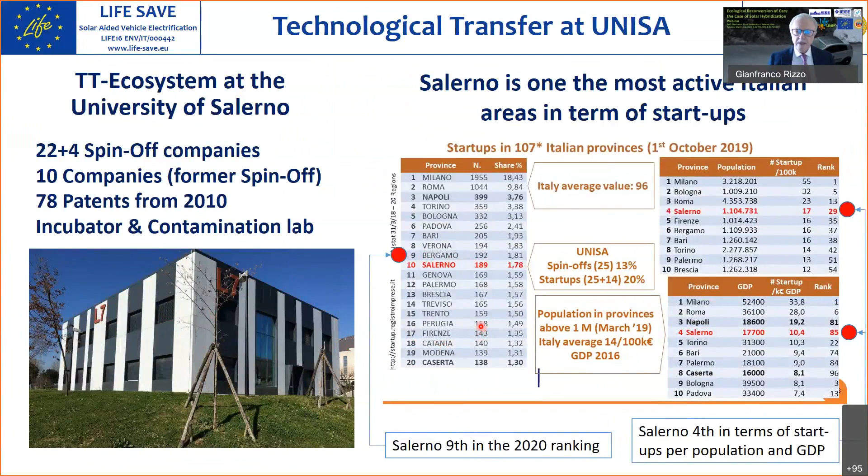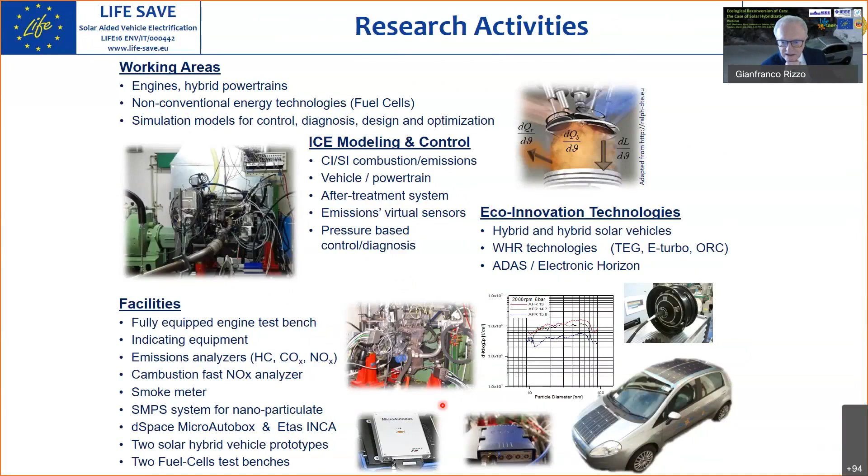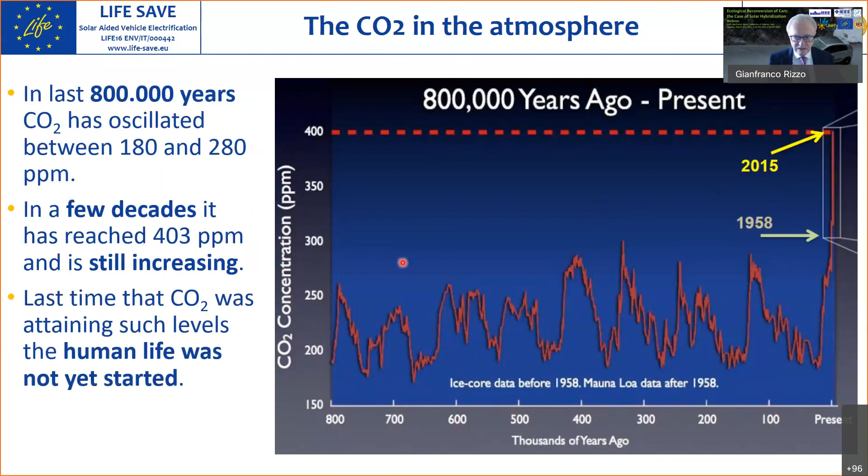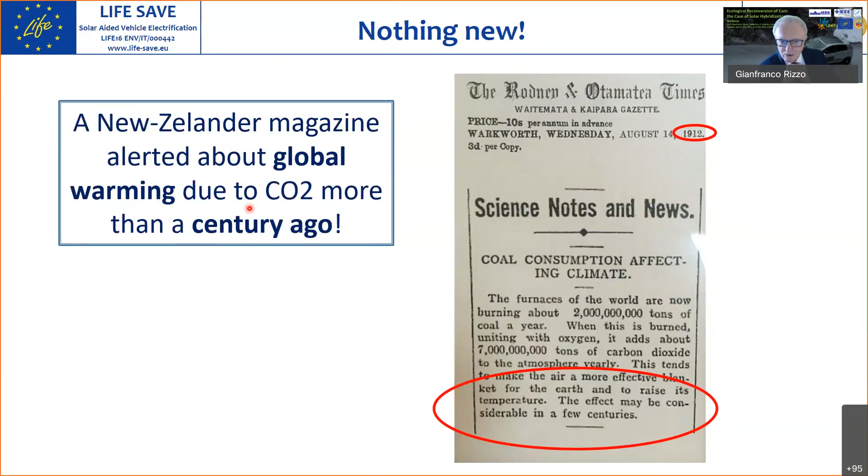In the last decades, CO2 concentration has reached values which have never been reached since human life was on earth. So it's a very, very serious problem. It's a serious problem, but it's not a new problem, because more than 100 years ago, a New Zealander magazine was already alerting about global warming due to CO2. So it's not a new problem.

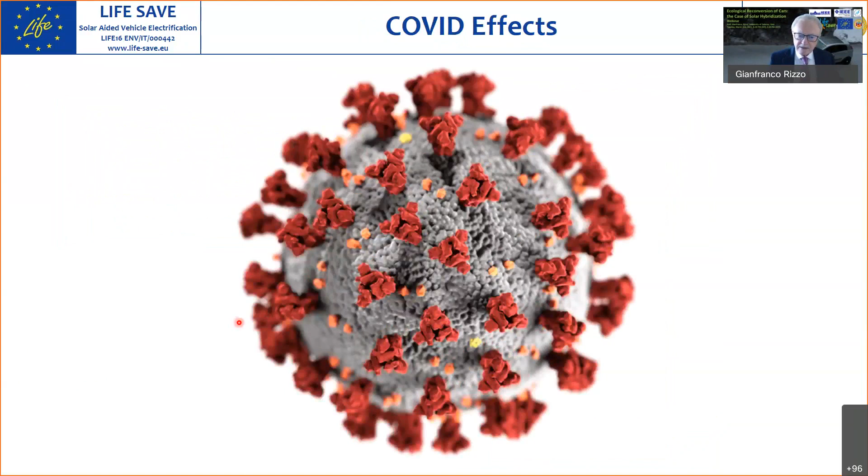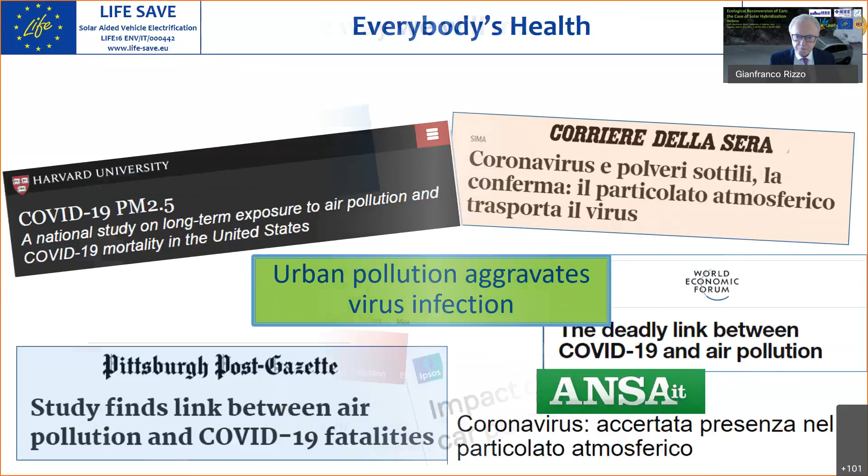In recent years, we have some additional problems which made this problem even more serious. One is due to the effect that global warming may have on the Earth, due to the possibility it could unleash some viruses, and also there is some evidence that urban pollution may aggravate virus infection due to transport of the virus. Also, it's reasonable that due to these constraints, there will be greater use of private cars for personal transportation in the near future.

And finally, we are facing a very serious economic crisis, and so we need reasonable and affordable proposals aimed at the majority of people in the world, not only in rich countries, able to create job opportunities.

Looking at the categories of sustainable mobility. So please, I hear some voice. If you can, cut off the microphone, please.

There are two categories of sustainable mobility. One is, of course, electric vehicles. The most common solution is the battery electric vehicle, an electric motor which may reach quite high efficiency, is fed by a battery, moving the wheels.

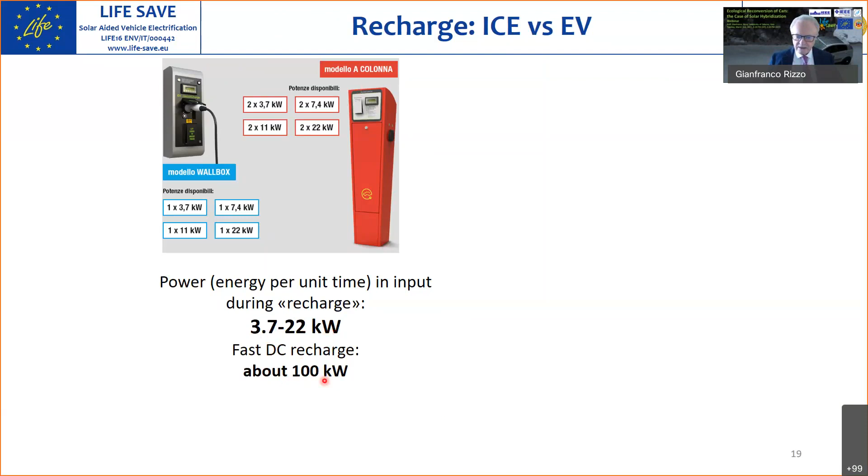But if we calculate how much energy enters in a unit time in an internal combustion engine, we reach almost 10 megawatts. So it's 100 times greater than the power of recharging electric vehicles. So there is still a big gap to be overcome.

So we may say that mass car electrification is the future, but it's not just around the corner, speaking about mass car electrification.

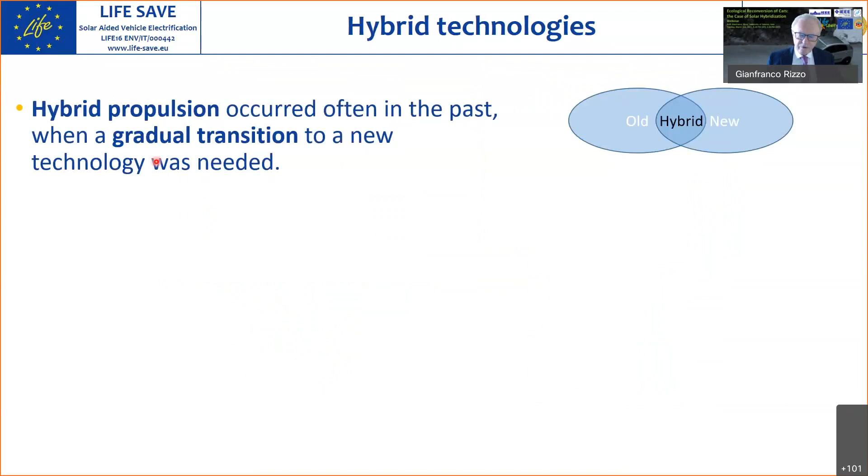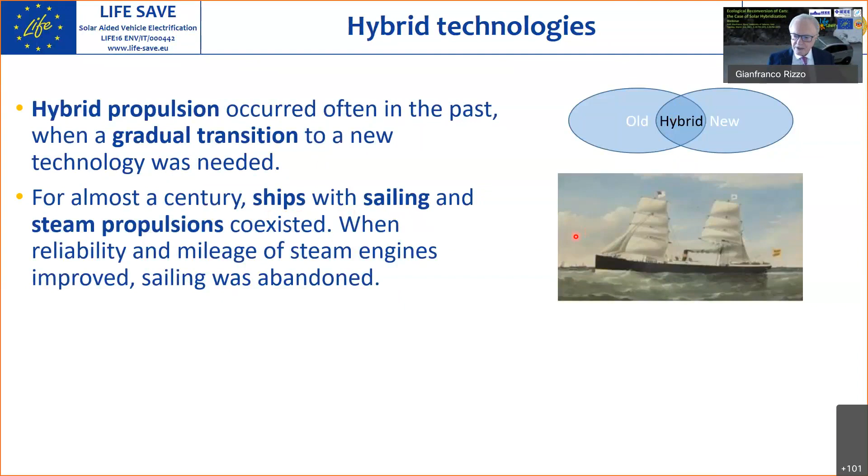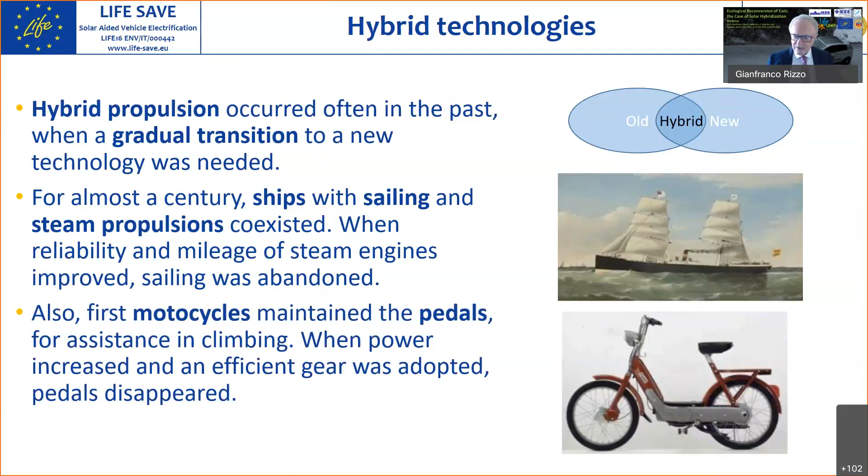As often happens when there is a transition from an old to a new technology, there is a gradual transition with some hybrid in between. So also when ships passed from sailing to steam propulsion, for a period these two technologies coexisted. And also motorcycles maintained pedals for assistance in climbing in their first years.

Now the hybrid vehicle market is growing fast and is anticipated to have an annual rate of growth of about 16% during the period from 2020 to 2025.

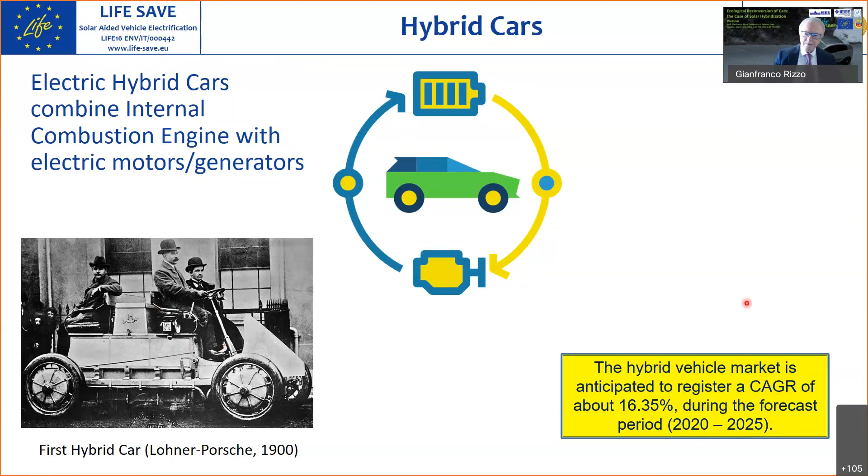Going to hybrid vehicles, there are different technologies. One is the architecture of a parallel hybrid, where the electric motor and the engine may cooperate to move the wheels, going in parallel.

The other architecture, less diffused, is a series hybrid, where the electric motor alone moves the wheel and the engine recharges the battery by means of an electric generator.

A special category of parallel hybrid, strictly related to our case, is the parallel through-the-road hybrid electric vehicle. In this case, the engine moves two wheels, and there are two wheels moved by electric motors in the wheels. The other two wheels are moved by the classical internal combustion engine. So the mechanical coupling between these two is made by the road, hence the name through-the-road parallel.

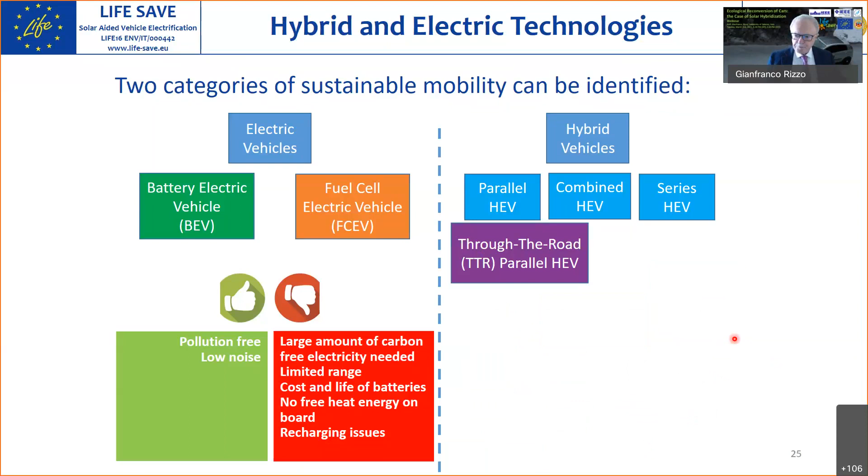And finally, we have the plug-in hybrid electric vehicles, which may be recharged both internally, by regenerative braking and by the engine itself, and by the electrical grid.

Also, in this case, we have some positive and negative aspects for hybrids. They have lower emission compared to internal combustion engine vehicles. They have an extended range, so they don't suffer from the range problems of electric vehicles.

But also in this case, some carbon-free electricity is needed for recharging from the grid. There is still an issue relating to cost and life of batteries, if less strong than in electric cars, and they have no zero emission.

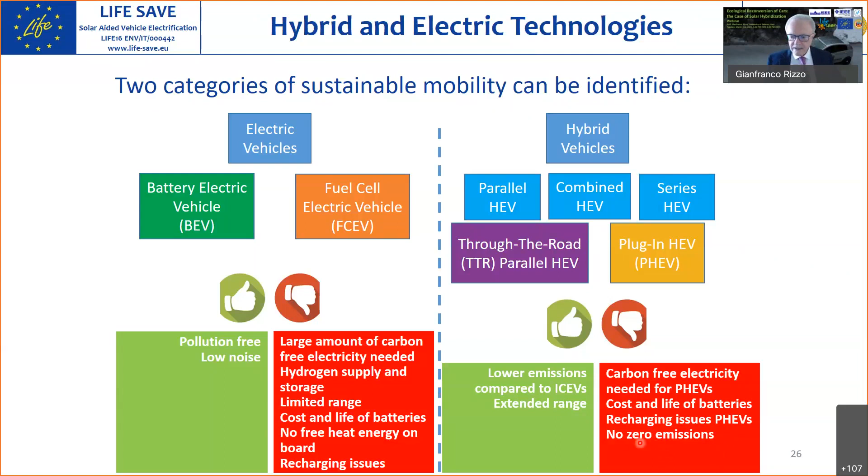We could speak a lot about hybrids. In this seminar, we can just give some brief information. One of the key parameters to classify hybrid vehicles is the degree of hybridization.

The degree of hybridization is defined as the ratio of the maximum power of the electric motor over the sum of the maximum power of the internal combustion engine and of the electric motor. This ratio may range from 0 to 1. 0 means we have the classical thermal engine, and 1 is the electric vehicle. In between, we have a large range of hybrids.

We can also say that only vehicles with enough degree of hybridization reach the real benefit of a hybrid, while all these vehicles are called hybrid. This is another problem: be aware that we can call hybrid also a vehicle with very few features of hybrid vehicles.

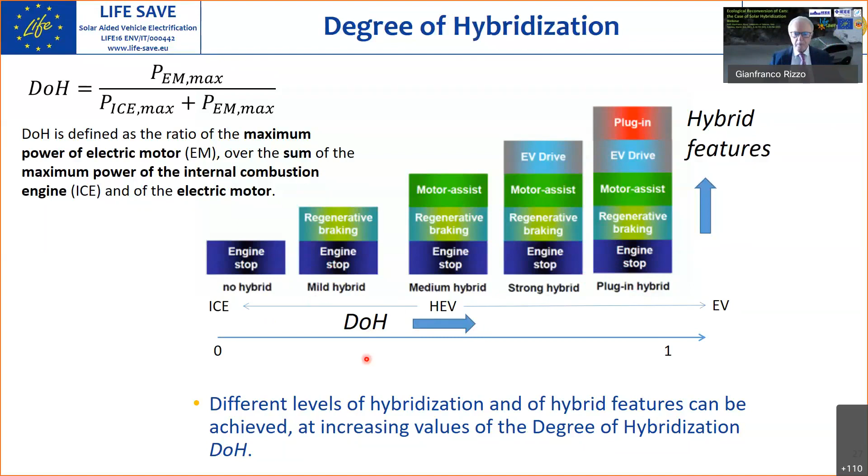But in order to substitute the conventional car with electric or hybrid vehicle, we should do a massive disposal of the actual fleet. And this is not a sustainable perspective for a number of reasons. So there is also another possibility to convert the vehicle.

One is the first conversion that has been diffused: electrification, which consists in removing the internal combustion engine and installing an electrical powertrain. Some specific regulations have been introduced in Europe by Italy and France.

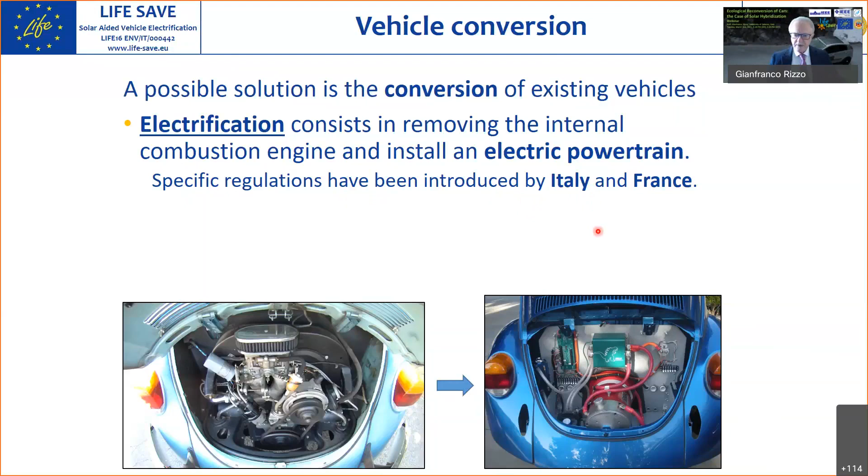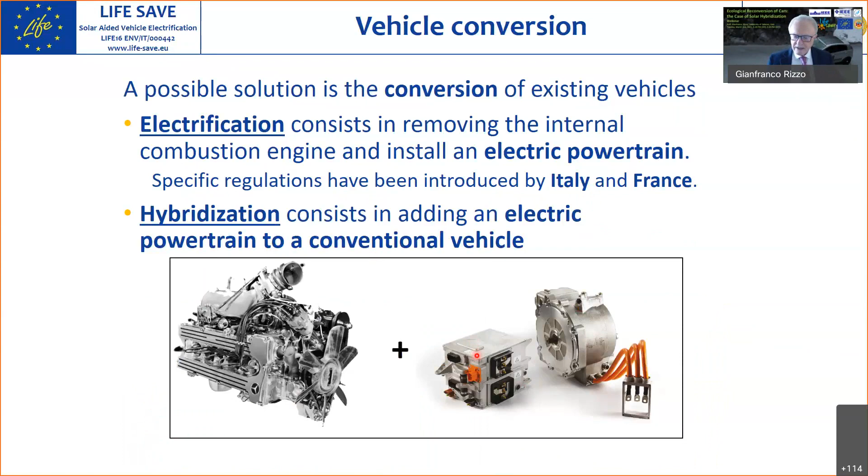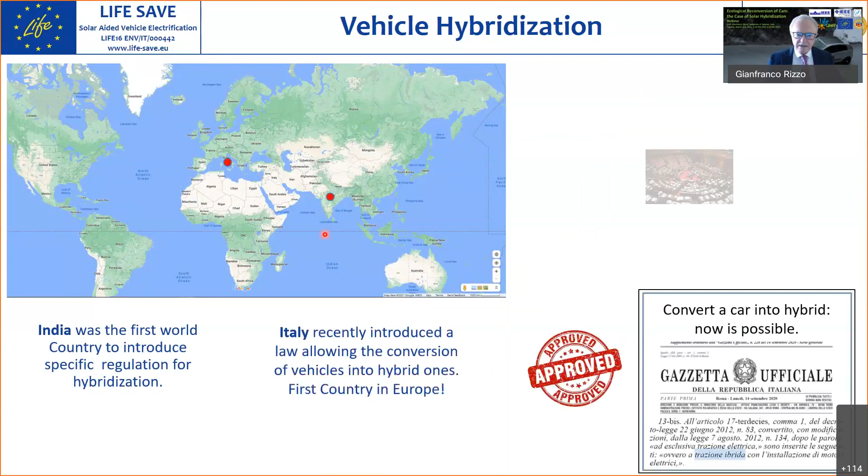Hybridization consists in adding an electric powertrain to a conventional vehicle, so it becomes a hybrid vehicle. In this case, the first country in the world to introduce a specific regulation for hybridization was India. And last month, Italy introduced a law allowing the conversion of vehicles into hybrid, as the first country in Europe.

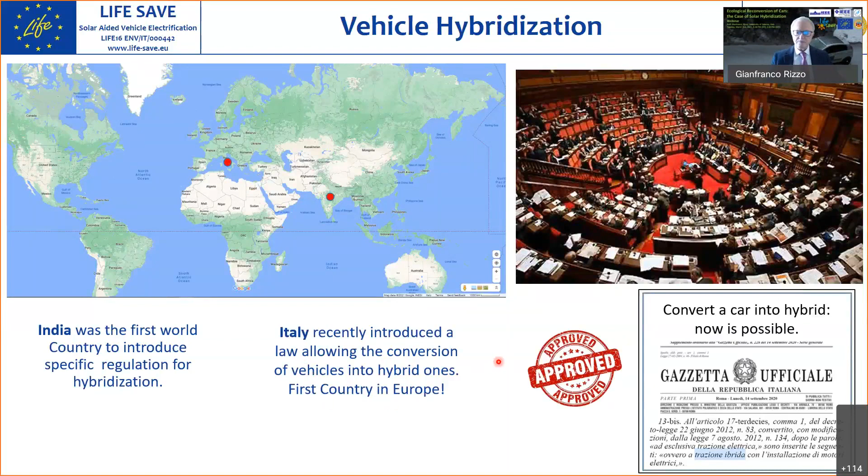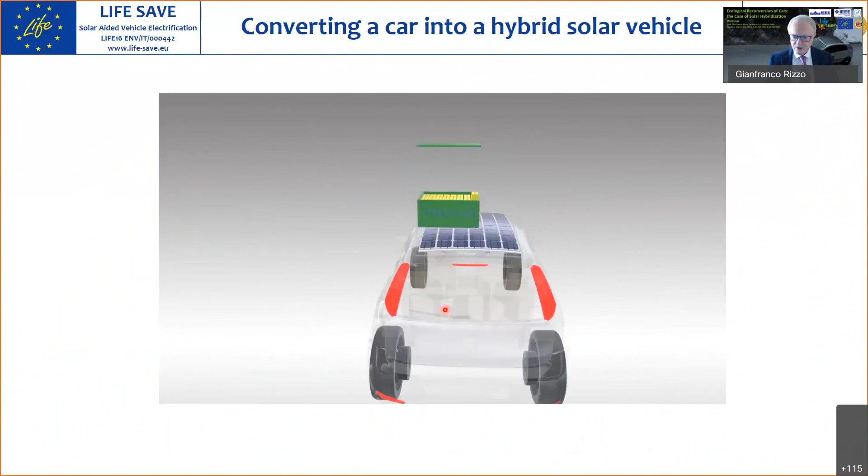So our proposal deals with converting conventional cars into hybrid and solar vehicles, and I will talk about this. The conversion will be done as shown in this short video, by adding some electric motors, some panels, and an additional battery.

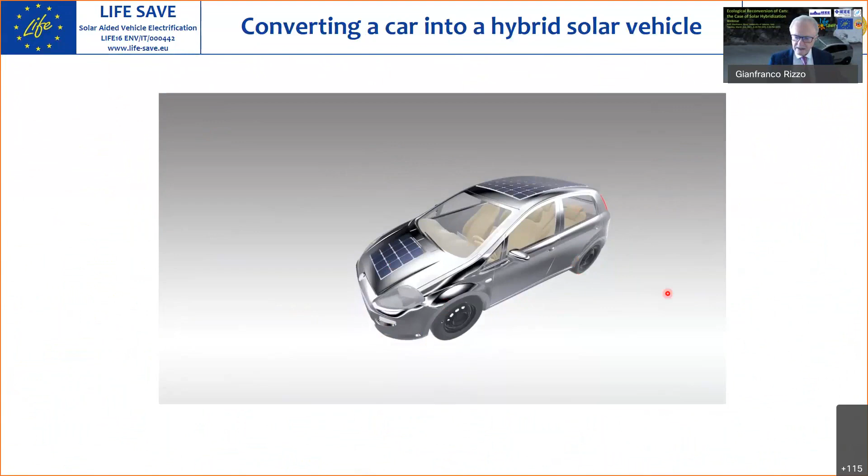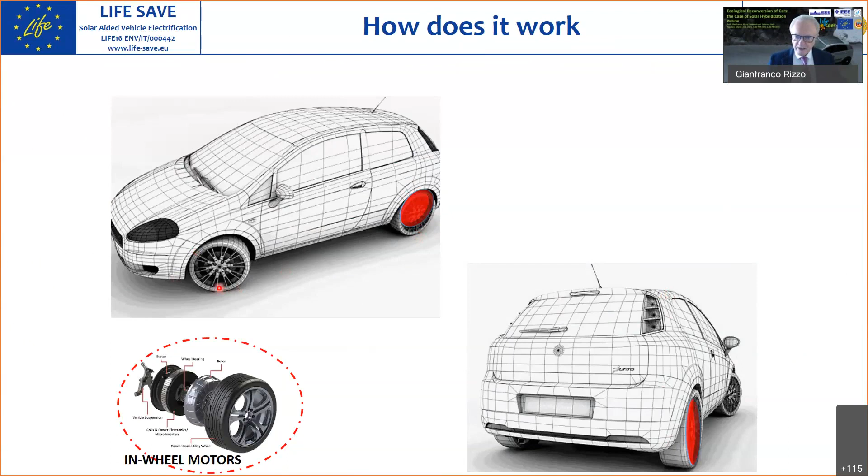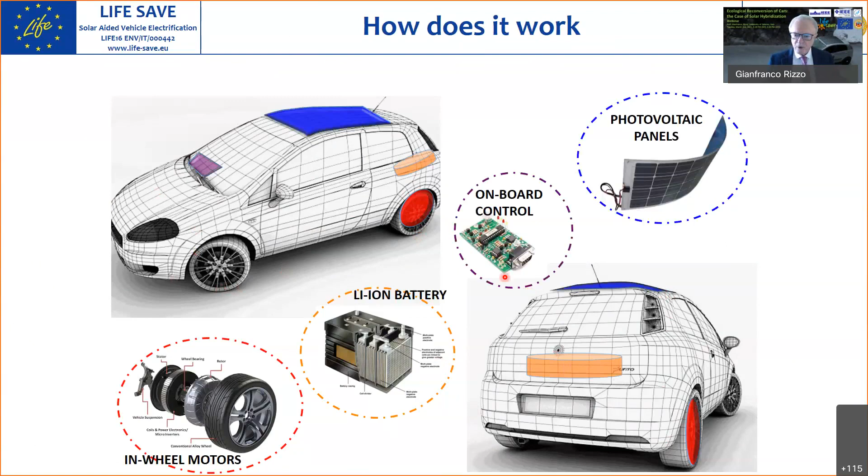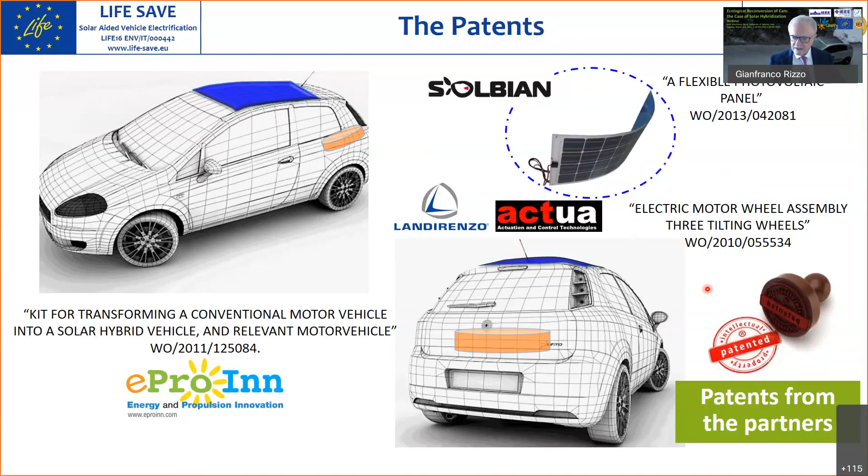Wheel motors are added in the rear wheels, while the front wheels are moved by a thermal engine. An additional battery is placed in the vehicle, some photovoltaic panels, an onboard control system, and this technology has been patented by the startup that I and some colleagues of mine have founded at the University of Salerno, ePro-Inn, and by some partners working with us in the projects.

The benefits: the reduction of fuel consumption and emission may reach even 20-25% in the best conditions in typical urban driving, say driving for 1 hour per day on a sunny day, with the possibility of recharging for free with the sun.

And associated with the lower usage of the internal combustion engine, there is lower emission, almost proportional to the reduction in fuel consumption, with the possibility to drive with only the electric motors in controlled traffic zones, so with zero emission driving.

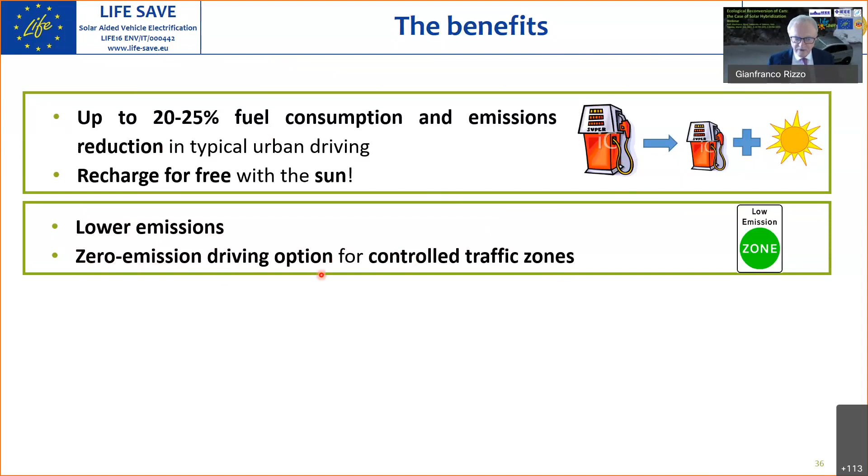The range is extended also with respect to conventional cars, because we don't eliminate the thermal engine, but we add some motors with a battery, so the range is extended. There's also an advantage in performance, higher torque, particularly enhanced acceleration, because we have electric motors in the rear wheels, and the rear wheels contribute more in the acceleration phase.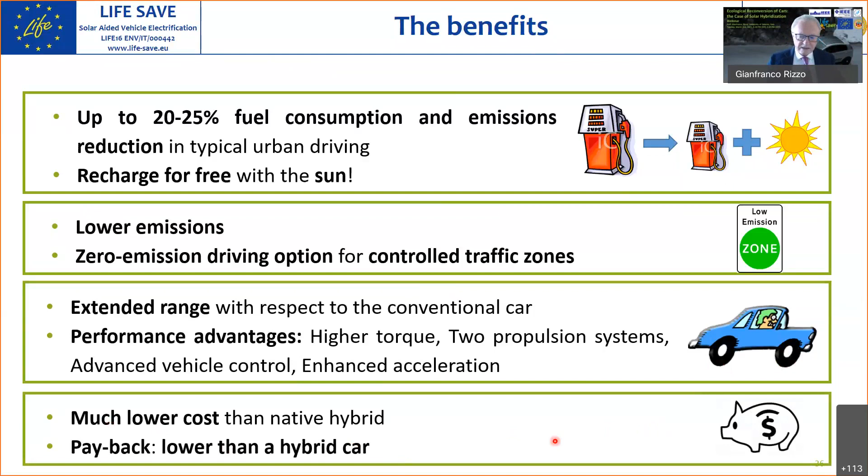And of course, the cost is much lower than a native hybrid, and the payback is better than a hybrid car. But there are also other aspects to be considered.

This proposal complies with all major criteria of sustainability. We say the 3 R's: reduce, reuse, and recycle. Particularly, we allow reusing existing cars, avoiding fleet scrapping.

And in fact, this proposal also complies with the Sustainable Development Goals defined by the United Nations, the 2030 Agenda for Sustainable Development. Most of these 17 goals are complied with by our proposal. I have no time to explain in detail now, but we can talk about this also.

This is the scheme of the hybridized vehicle. Front wheels are moved by the internal combustion engine. There is an electronic control unit, which is connected with an onboard diagnostic port. In our solution, we derive this signal from this OBD port and interpret it in a VMU, an additional vehicle management unit.

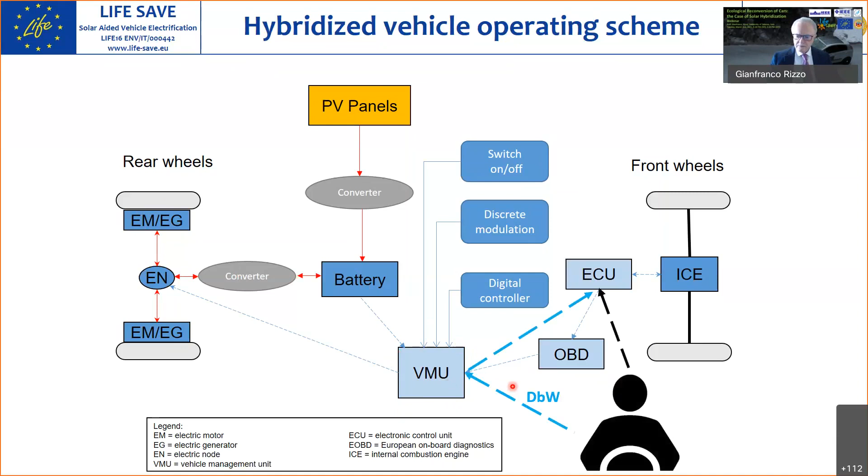So in terms of battery energy, they must have enough battery energy to store the solar energy coming in on a sunny day, so from 2 to 4, but even up to 10 kilowatt hours. The degree of hybridization is from about 0.2 to 0.3.

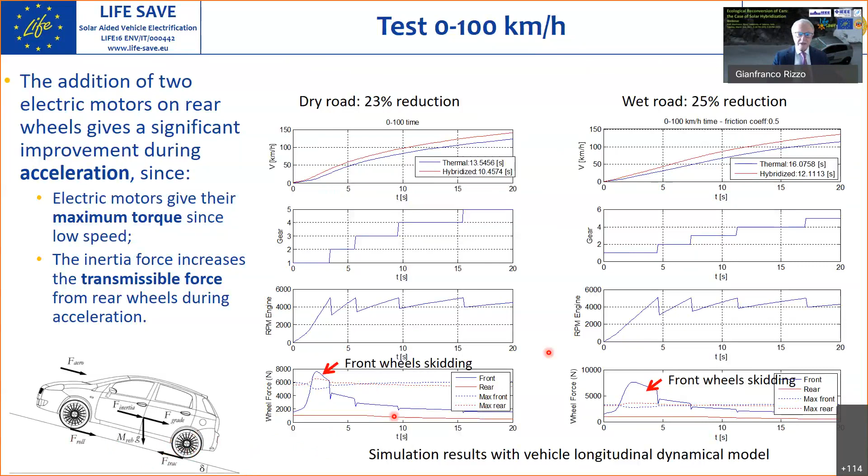This is a test showing in simulation that there is a significant increase in acceleration due to the addition of two electric motors in the rear wheels. And in this case, we can also avoid skidding in the front wheels due to the cooperation of the rear wheels in the acceleration phase, particularly on wet roads.

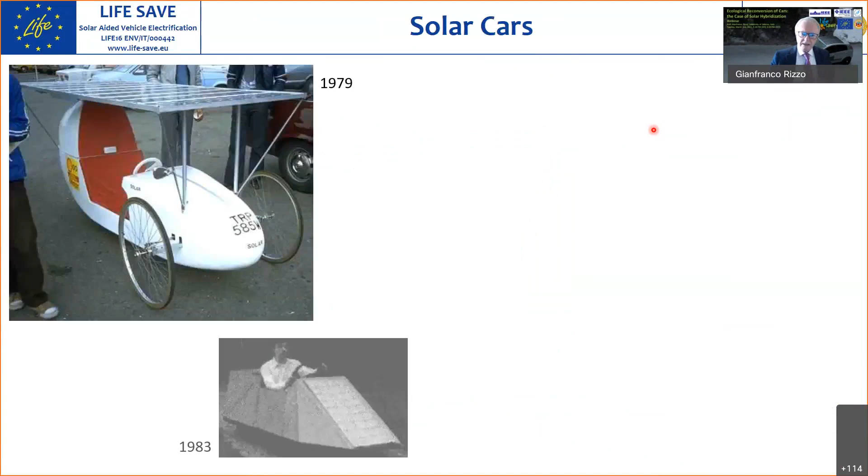So a few words about the use of solar energy in automotive. Solar cars appeared for the first time in the 60s and 70s, due to the success of solar photovoltaics in space vehicles, and after some first very naive prototypes, some very advanced cars have been developed by universities and by companies participating in the competition in Australia and in other parts of the world. There is, for instance, the Nuna developed at the University of Delft, reaching a very high speed.

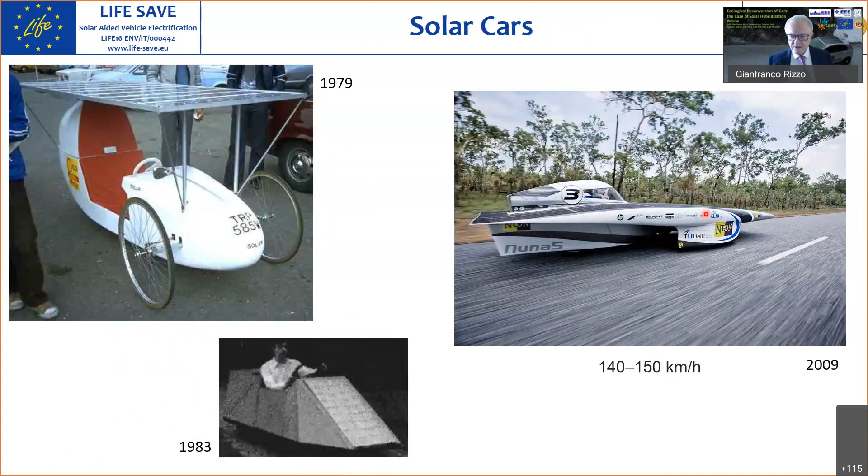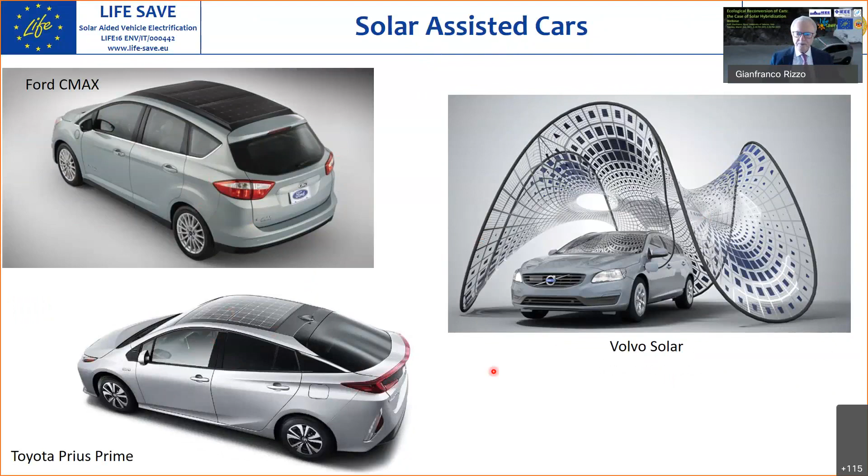But these solar cars were intended to be moved only by the sun. This is not a practical solution for a number of reasons. And so the idea to assist cars with solar power gained space in the last decades. And there are some cars from Toyota, and from Ford also. While recently, the idea to make some cars move essentially with the sun also gained space. Now there are some very advanced prototypes.

So speaking about the use of photovoltaics in automotive, we first have to say that the use of photovoltaics on the vehicle is the only case where the primary energy can go directly to the wheels, while in all the other cases, we have to incorporate primary energy in an energy vector, maybe gasoline, maybe oil, maybe electricity, hydrogen, by some operation like energy conversion and distribution, which give rise to consumption of energy, to emissions, and of course to profit and taxes.

So the only case where we can use energy from nature directly on the vehicle is photovoltaics on the vehicle. But unfortunately, there are some limitations due to the energy density arriving on a square meter on the Earth. So if we look at the incoming power, this analysis may be discouraging, because we can see that the power of a vehicle may be, for instance, 60 kilowatts, while the power of a photovoltaic panel to be put on the car may be 0.3, 0.4, 0.5 kilowatts. So it's much less.

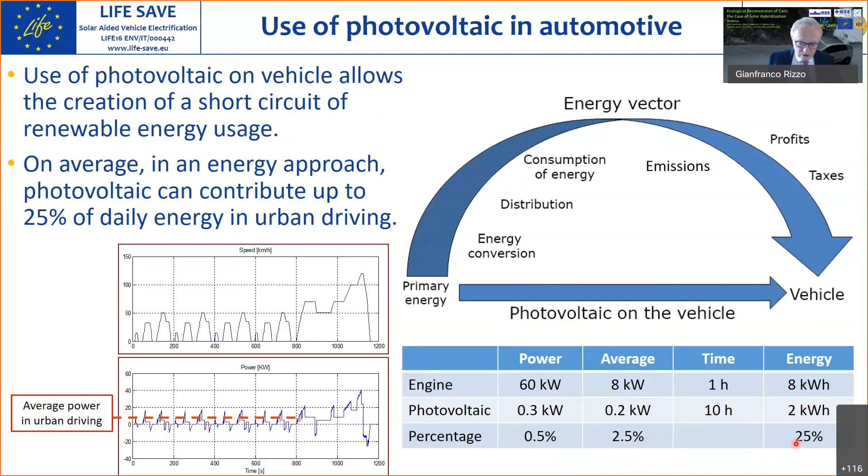So if we consider at this point the energy consumed during the day by a car driving in a city, which is 8-10 kilowatt-hours, and compare it with the energy that could be taken by photovoltaics in the best conditions, which may reach 2 kilowatt-hours, the ratio is 25%. So it's not negligible. And in fact, a recent market study shows a very interesting growth rate of 36% annual growth in the next decade.

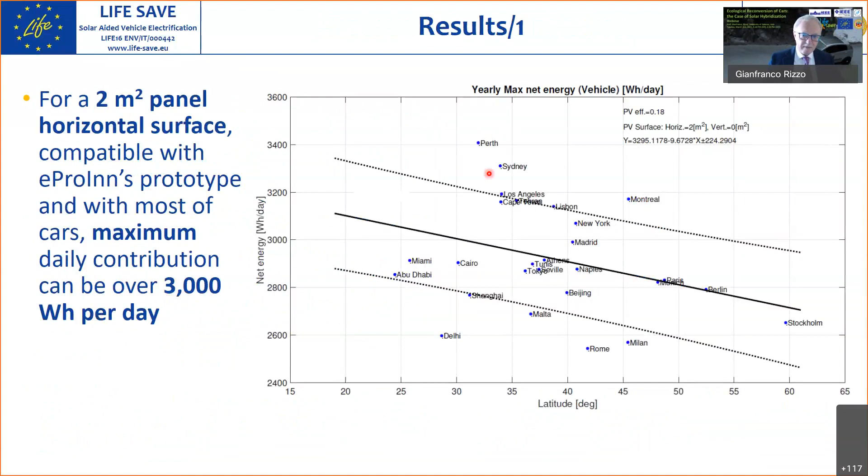We have also made some studies in order to estimate the contribution from solar photovoltaic panels by considering some databases. PVWatts is an American database that considers typical meteorological years, so as to take into account also the main effect of bad weather and so on. So in this case, we have seen that considering a 2 square meter horizontal panel surface, which is compatible with most cars, the maximum daily contribution can be over 3 kilowatt-hours per day in some very good places like Australia.

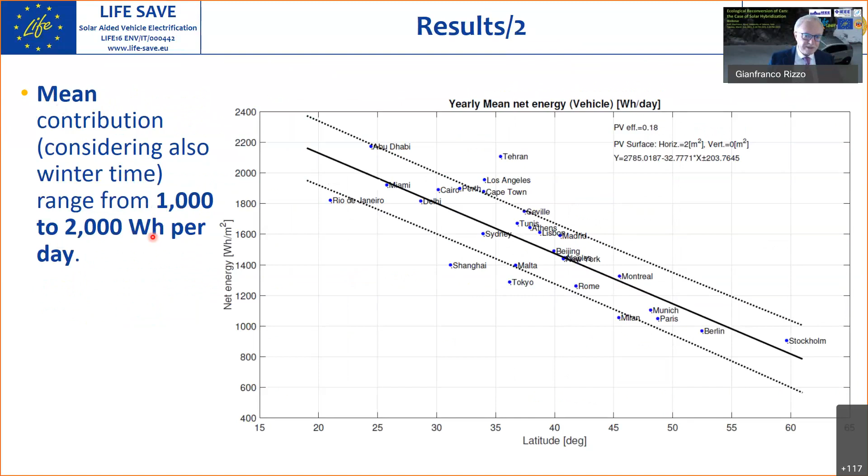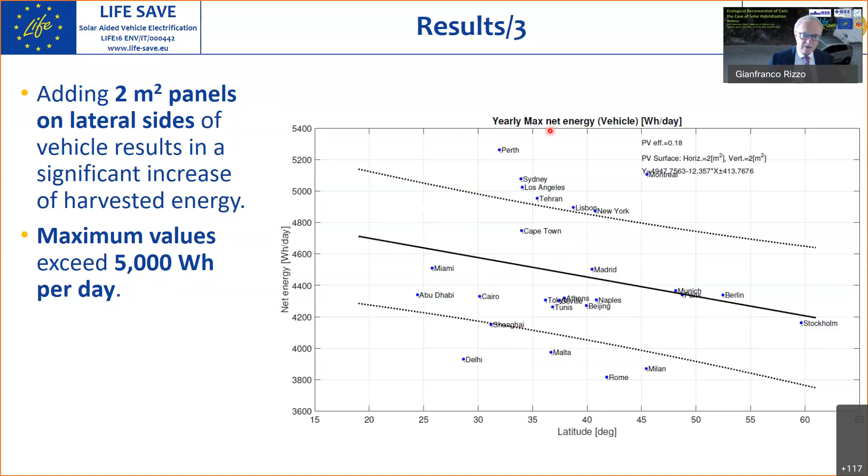But the mean contribution, also considering winter time, ranges from 1,000 to 2,000 watt-hours per day in most places of the world. And if we also add some panels on the lateral sides of the vehicle, the maximum value may exceed 5,000 watt-hours per day in the most favorable places, and the average contribution ranges from 2 to 3 kilowatt-hours per day in most places.

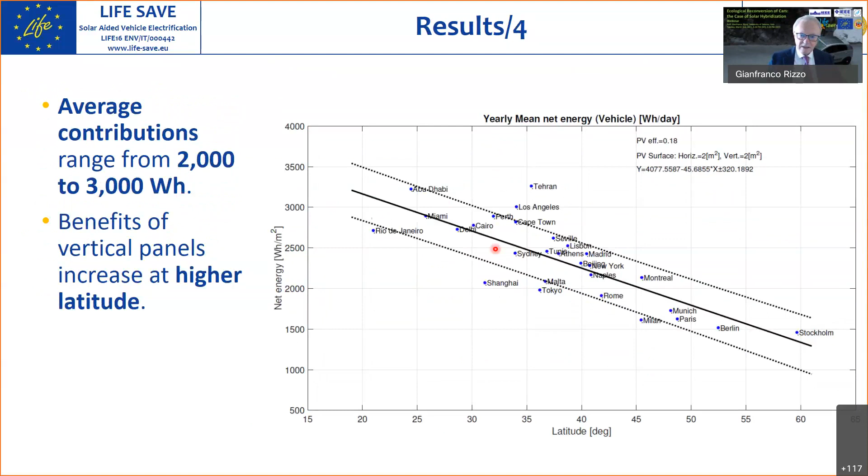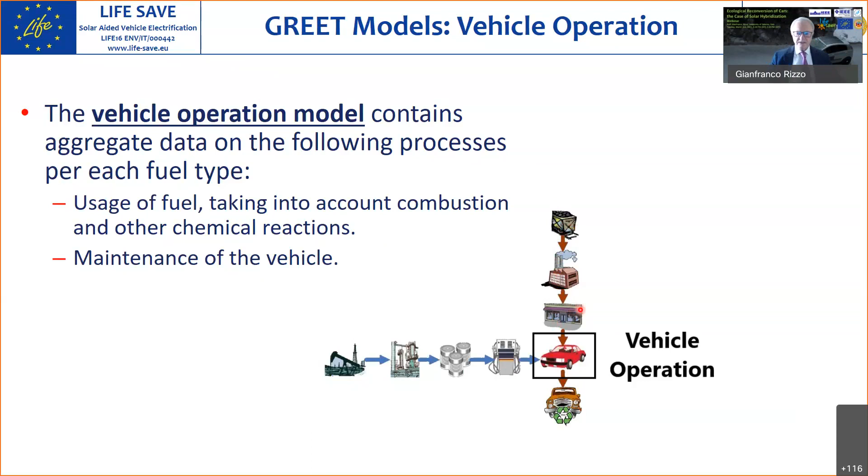So another aspect is considering the life cycle assessment of this system. As we know, when considering the life of a car, we have to consider the several contributions to energy consumption and emissions coming from the usage of fuel, for instance, considering all the chain carrying the energy to the car, and also all the cycle relating to the building of the vehicle and to its disposal also.

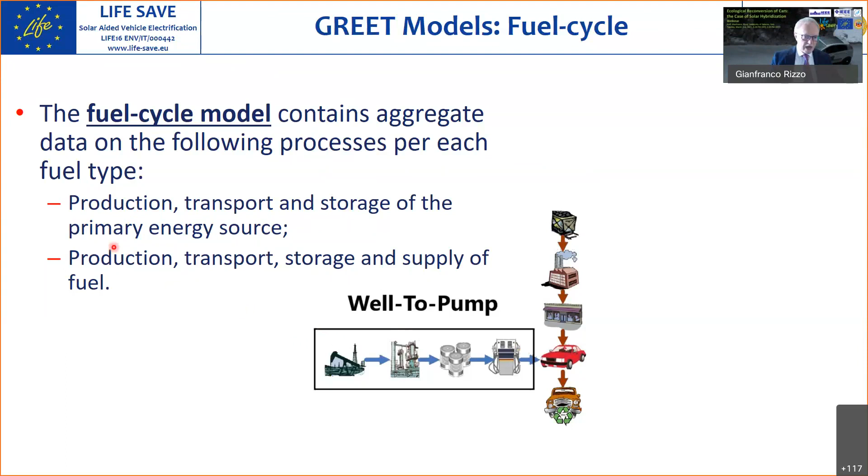So in this case, we used a model developed by the Argonne Laboratory in Chicago, which has a very, very advanced database considering most of these effects, and also relating to the well-to-pump aspects, from production, transport, storage of the primary energy source and the fuel. Also, the extraction, recycling, processing of the materials, manufacturing process, and disposal.

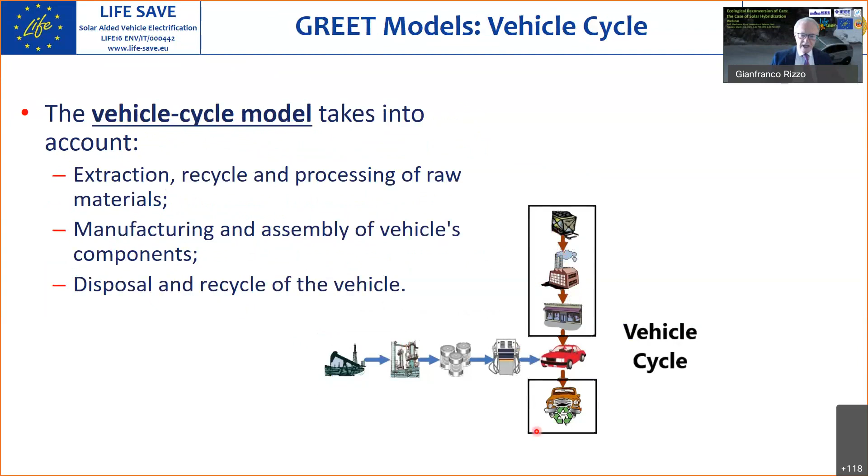And so, in this case, we considered a scenario where a person, after driving his car for some years, may decide to keep the car or to buy a new car and dismiss the old one, taking a hybrid or plug-in hybrid or electric, or converting the car by a hybrid solar kit or by an electric vehicle kit. And we published a couple of papers on this.

And shortly, the results were that vehicle operation, as expected, has a major role, from 50 to 60%, both in terms of energy consumption and greenhouse gas emissions, CO2 emissions. But there is a not negligible contribution from the fuel cycle and from the vehicle cycle too. The vehicle cycle, which is not considered in many cases, accounts for 20% of the entire process.

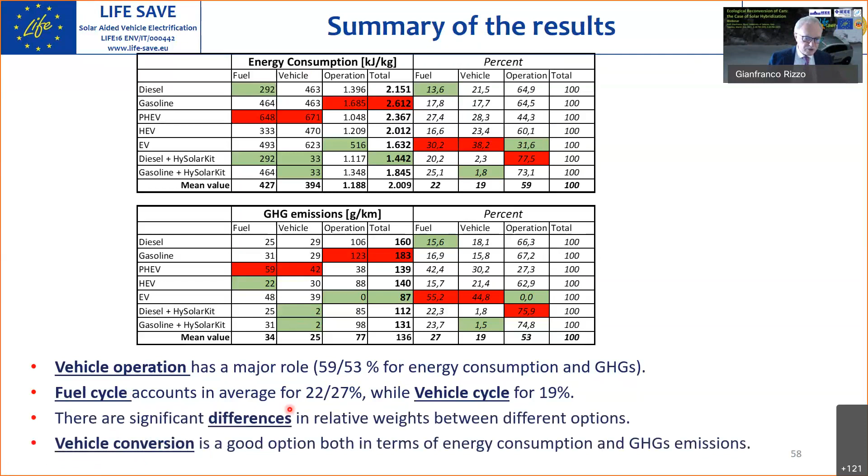So considering this aspect, when we add a kit to a vehicle, the cost in terms of energy and emission of the kit is quite negligible compared to the cost of a new vehicle, of course. If we make the comparison of the different cases, we arrive at the conclusion that in many cases converting the car is the best solution from an overall point of view, just because we strongly reduce the aspect relating to the vehicle cycle. So the conclusion is vehicle conversion is a good option, both in terms of energy consumption and of CO2 emissions.

So now I would show some research work done on this aspect. We first assessed the benefits of the kit for solar hybridization by simulation studies, by building some MATLAB Simulink models of a conventional vehicle and the vehicle equipped with this kit. And the main results were that driving distance and type, urban versus highway, and the availability of charging infrastructure play an important role in the fuel economy of the vehicle.

And the solution without PV panels results in higher payback time for any in-wheel motor considered. So it's worth using PV panels. And there is a significant reduction in fuel consumption and CO2 emission, up to 20% in selected configurations, comparable with hybrid benefits, but at a lower investment cost.

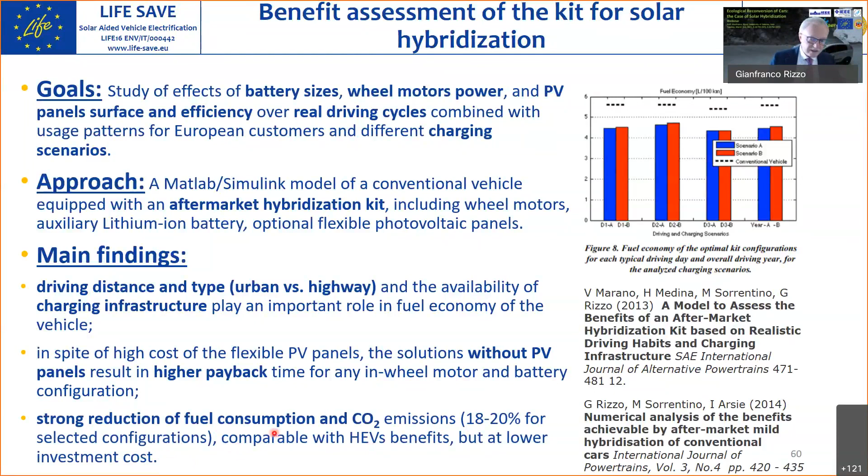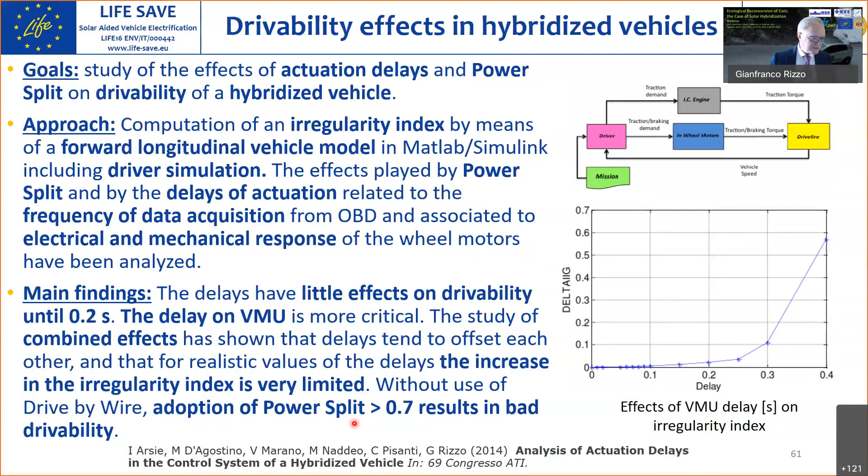We also studied some aspects relating, for instance, to the effects of the actuation delays in the hybridized vehicle. We studied how fast the actuation in our kit must be in order to make the vehicle drivable, and we verified that with the used actuation delay, we have no problem of drivability, while there is a limit in the adoption of a power split. Power split is the fraction of the power that could be given by the electric motor. In this case, power split could not exceed 0.7 or 0.8 for reasons of drivability.

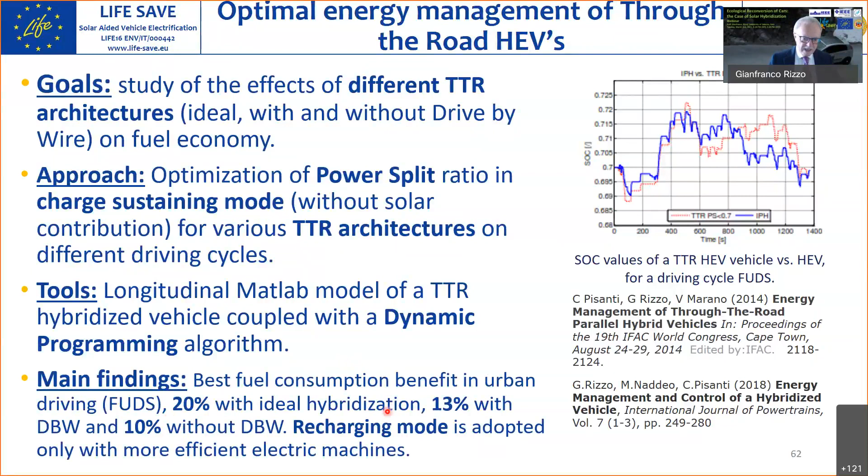We have also tried to optimize the control schedule of these vehicles. We have first done this with dynamic programming tools in order to achieve some offline picture that gives the benchmark of the benefits that could be obtained online. And also in this case, we have confirmed that benefits may reach 20% in best cases, and a bit less in some real cases.

Finally, we have also used some other optimal control strategies. This is a very recent result published in the PhD thesis of Francesco Tiano, who is one of my colleagues who worked on this also with Matteo Marino. Both of them are attending the seminar.

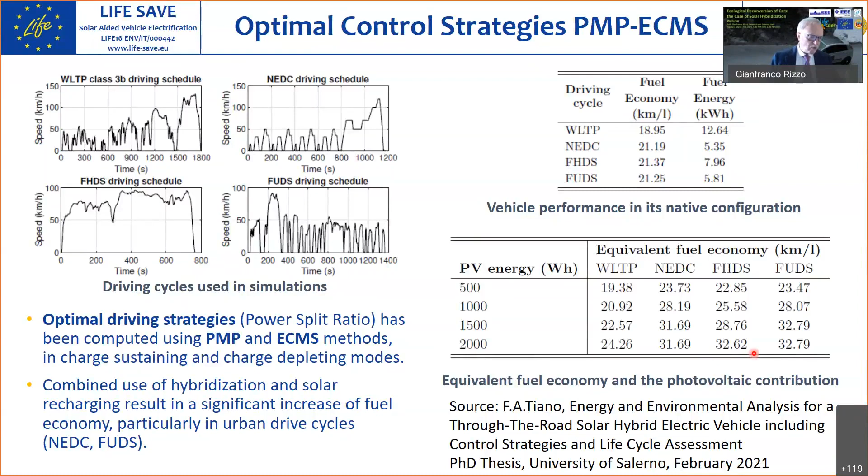We used the well-known Pontryagin minimum principle and the equivalent consumption minimization strategy, which are very popular ways to optimize the control in a hybrid. And we confirmed that, particularly in the case of use of the vehicle in charge depleting mode, which is typical of the vehicle used with solar energy, we may achieve some interesting reduction of fuel consumption comparable with those of some hybrid vehicles.

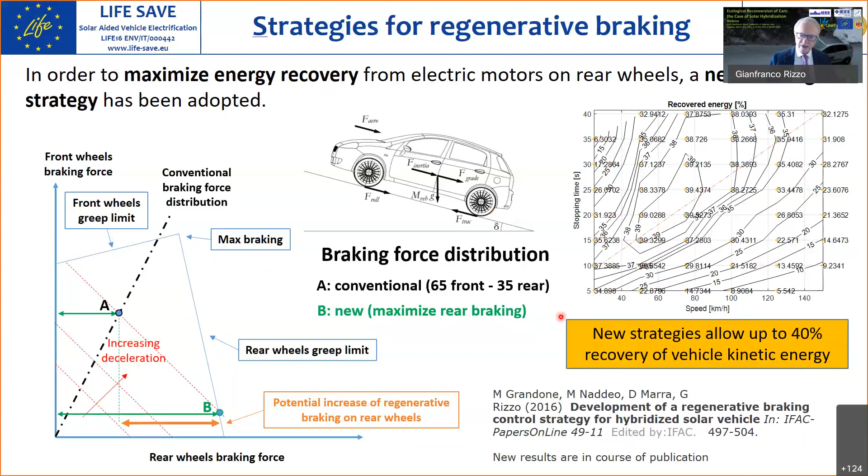Finally, we have also studied some thermal effects in PV panels on cars, because the use of photovoltaic panels on cars is quite different from what happens in a stationary application. Particularly, in this paper, we studied the effect due to temperature, as temperature has a negative effect on the efficiency of photovoltaics.

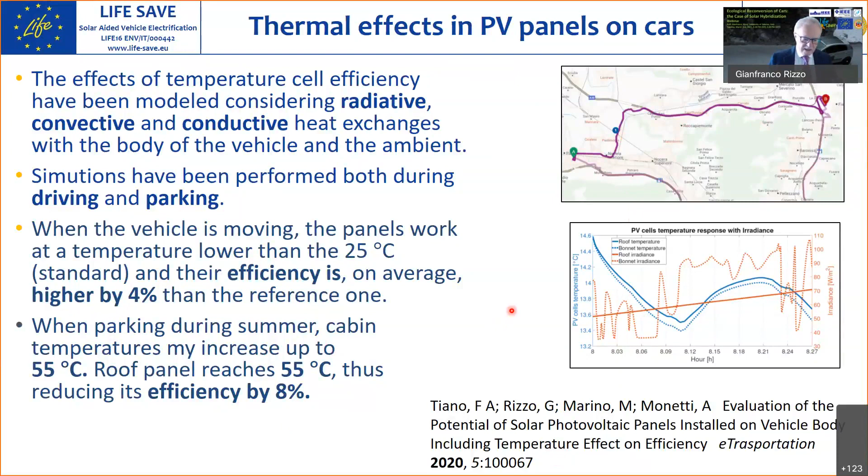So we studied this aspect when the vehicle is moving and when the vehicle is parked, and we estimated in some cases an increase of efficiency during the movement of the vehicle, and a decrease of efficiency when the vehicle is parked, and some solutions could be developed starting from these studies.

So we proposed this project to some European programs by making partnerships with some industries: Landi Renzo, Solbian and Mecaprom are three Italian industries. Solbian produces photovoltaic panels, Mecaprom produces powertrains and electric vehicles, Landi Renzo produces natural gas kits for cars.

And the European program LIFE financed a project to produce five prototypes to TRL9. TRL9 is the highest rate of the scale from 1 to 9; 9 means ready for industrialization. Also a joint venture could be done with the partners, and we are going to establish a new company between the partners, ranging from north to south of Italy.

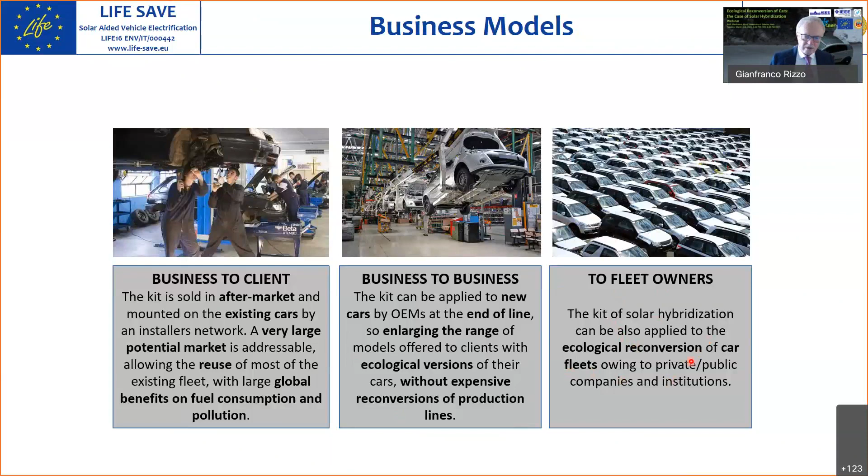Another solution is for fleet owners. The kit could be applied to the ecological reconversion of car fleets owned by private or public companies. This proposal has received large attention in the media. There are videos in many languages. One of these was in the top 10 world videos in 2016. A movie also has been shot with this car recently.

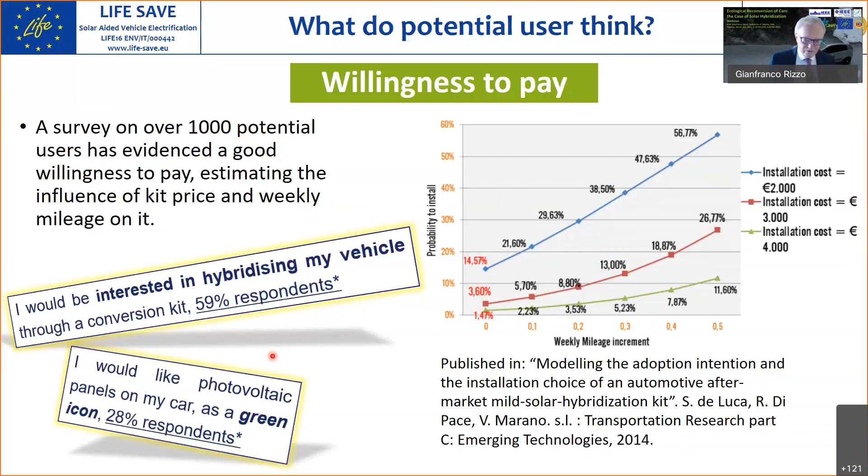There is a good willingness to pay from a survey made some years ago, and we were quite surprised that a significant number of people considered photovoltaic panels a green icon. So they like the photovoltaic panel irrespective of its usefulness. We also made a business plan to estimate the economic benefits in terms of market and return on investment of a company which could produce this solution.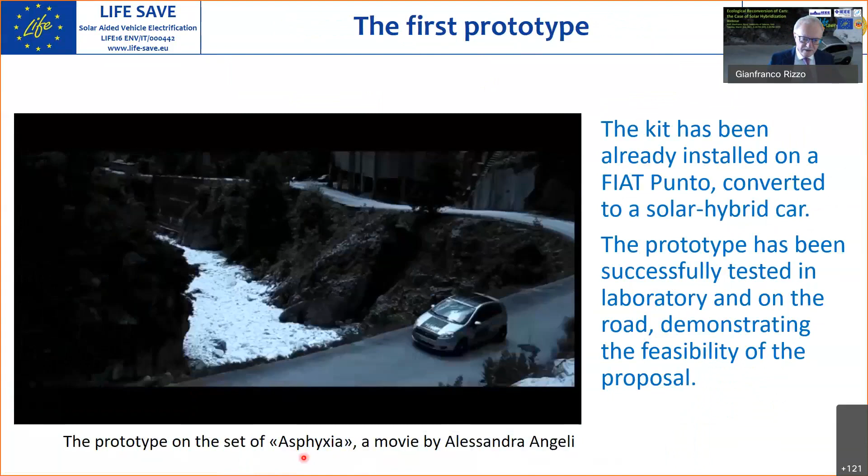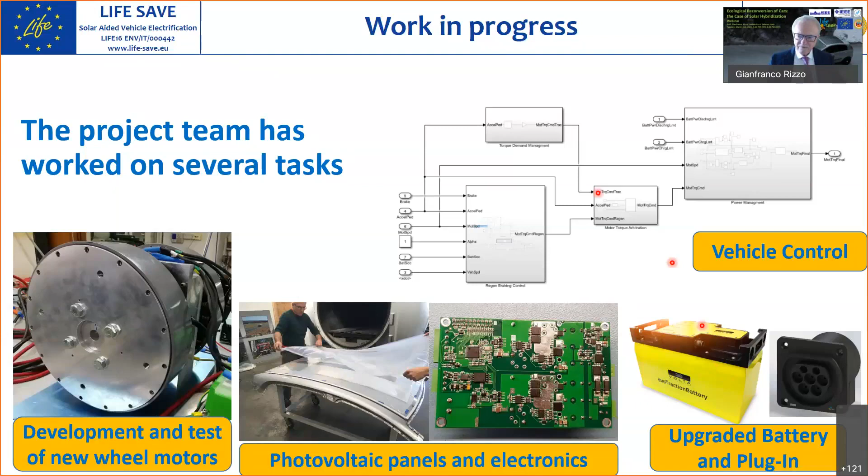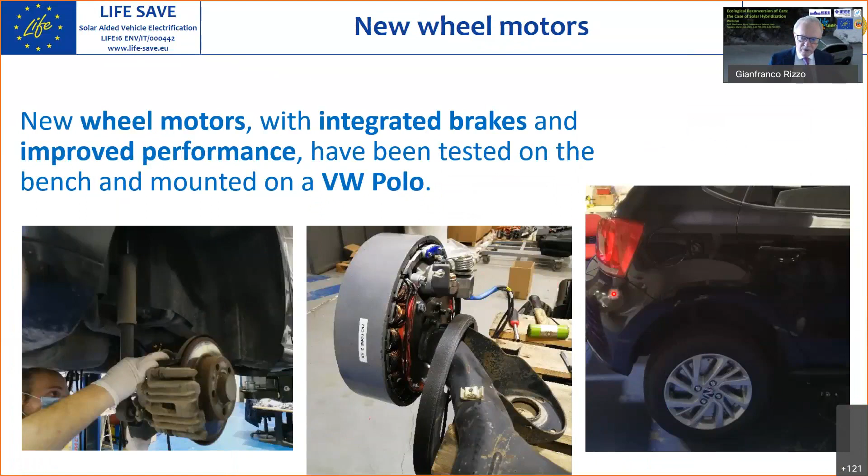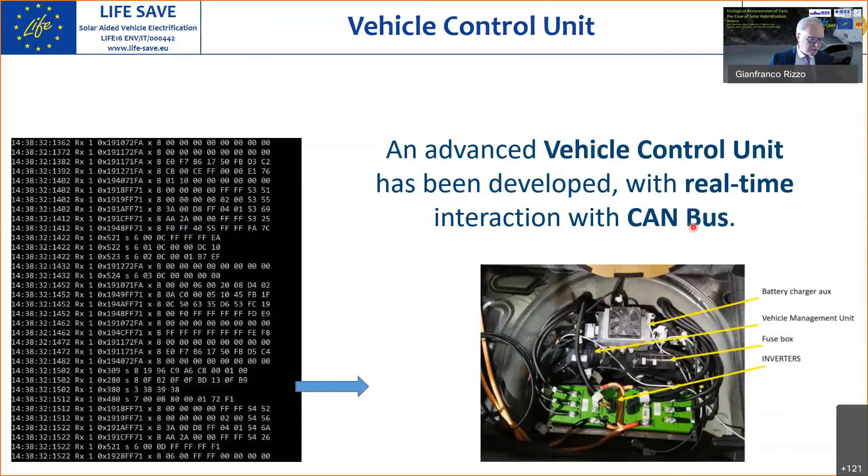This is a short video of the first prototype within the movie Asphyxia. The first prototype demonstrated the feasibility. Then these are some figures of the new prototypes being developed: new wheel motors with brakes integrated within the wheel, new flexible photovoltaic panels, an upgraded battery, and more modern vehicle control. They were mounted on a Volkswagen Polo some months ago, and now we are mounting them on a Seat Ibiza. We have developed an advanced vehicle control unit using CAN bus interactions, a very modern approach to control.

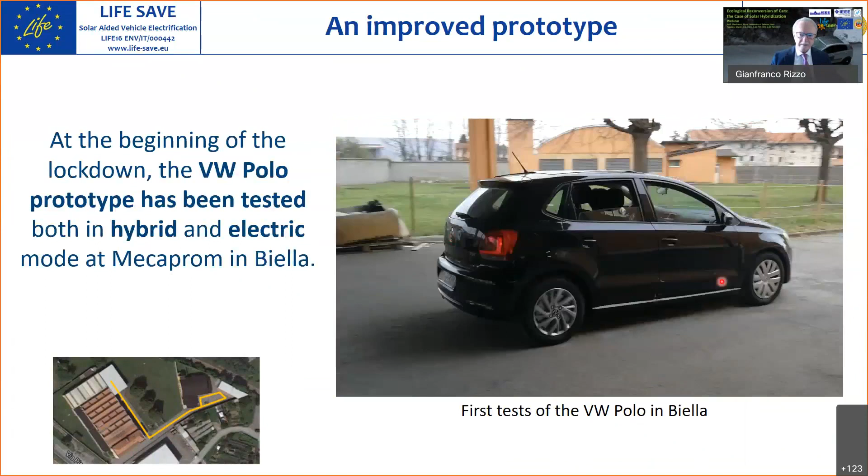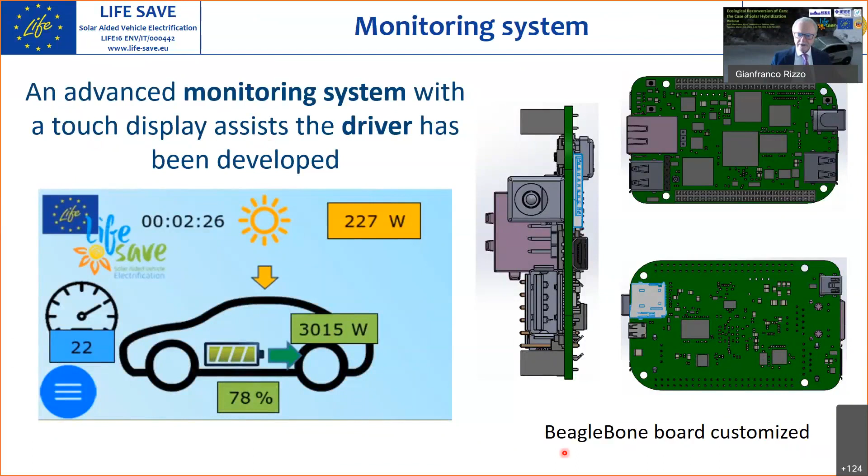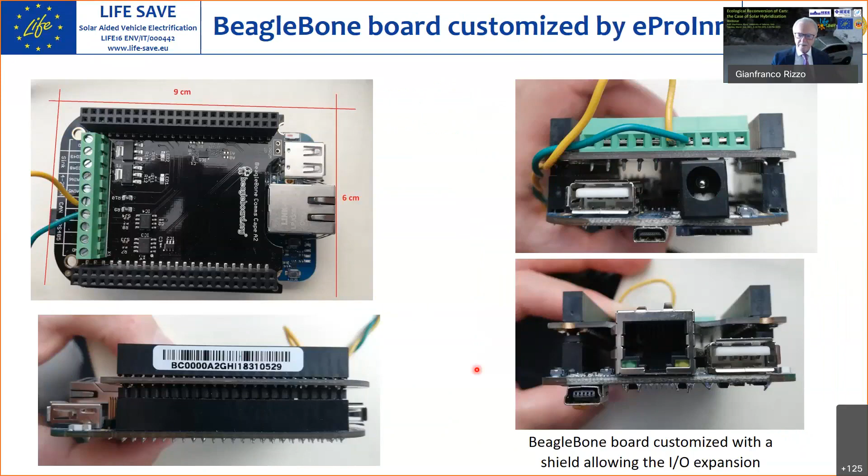This is a first video of the Volkswagen Polo in Biella. We are in the pandemic period. We are also developing a monitoring system to assist the driver with a BeagleBone board using Bluetooth technology. This is a picture of the BeagleBone, and this is the support produced by 3D printing.

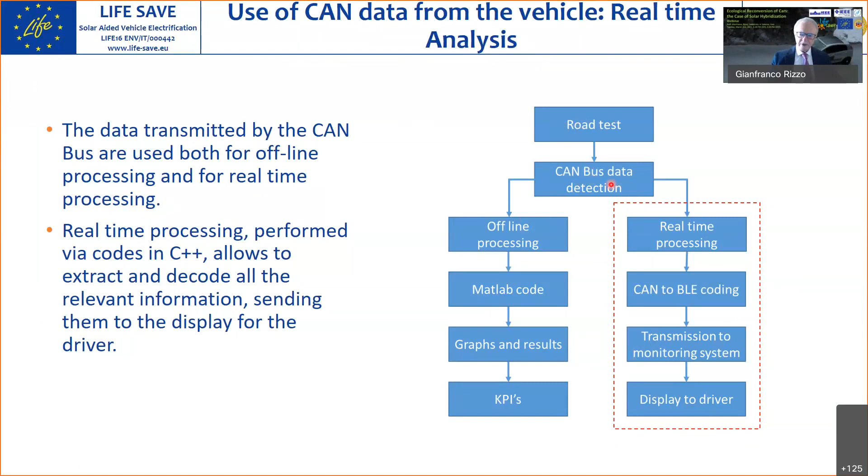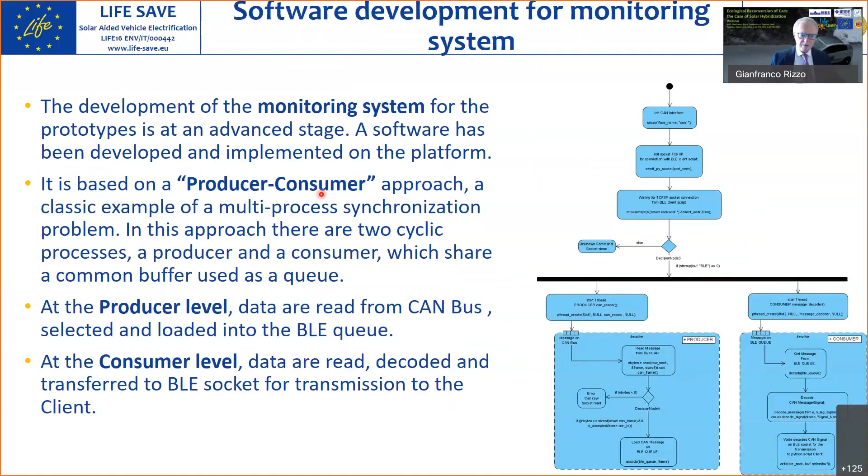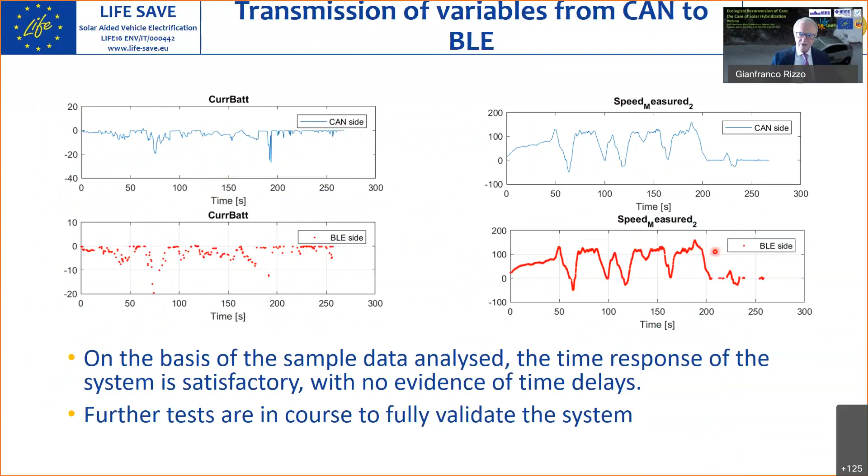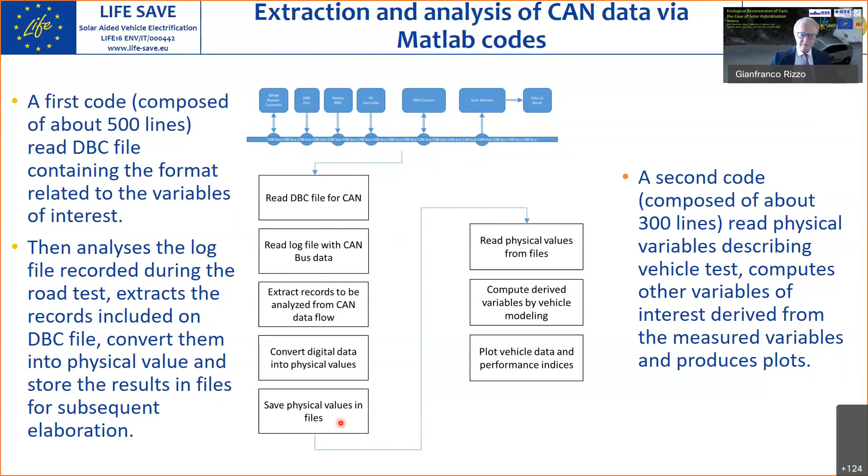Then we also worked on the software. We are going to analyze road tests using the data from the CAN bus with some software. This is the software used for the real-time approach, developed with a producer-consumer approach. And this is a sample of the data taken from the CAN bus and transferred to the Bluetooth receiver. We also developed other tools in MATLAB to analyze in a systematic way the results from the cars, and we are working on it.

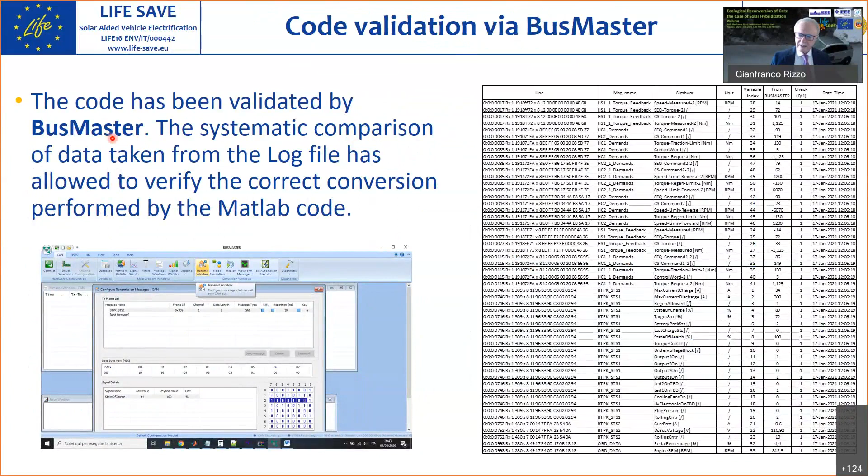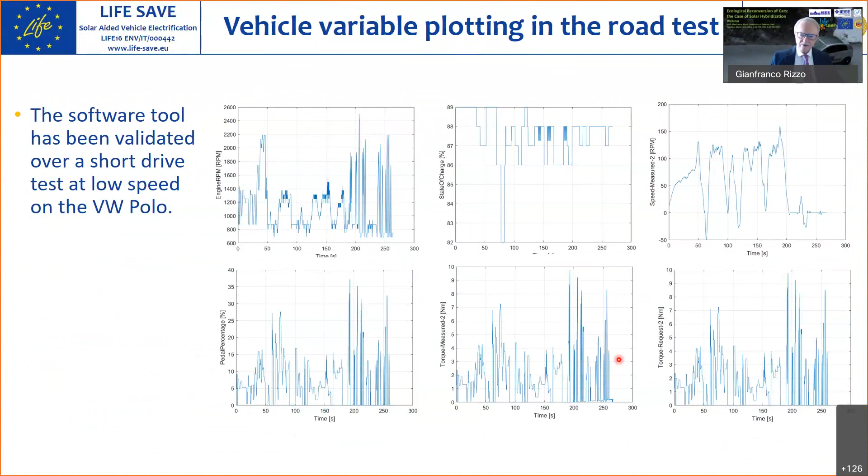This is the validation of the data taken by the CAN bus with BusMaster, some commercial tools, and a sketch of the data taken on the first test of the engine.

So we can go to the conclusion. Mass transition to electric vehicles is the future, of course, but it's not around the corner. Hybrid vehicles may represent a valuable solution in the short and medium term, but massive substitution of conventional cars with electric and/or hybrid ones is not affordable for many users, and is not the most sustainable option in the short term from an LCA perspective.

While the reuse and the conversion of existing vehicles, both by hybrid or by electric conversion, may represent a good short-term option within a portfolio of possible solutions. The Italian Parliament has now approved a law allowing the conversion to hybrid, like India did some years ago. And we can say that solar hybridization has some advantages with respect to full electrification in terms of range and in terms of recharging.

And the EU project LIFE SAVE, aiming at the development of prototypes for industrialization, is now at an advanced stage, and access to market is planned in 2022, possibly at the end of this year. And this is the website of the project.